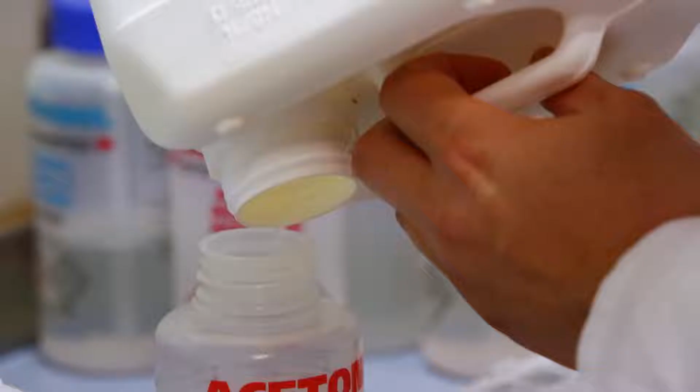We are Avantium. We are headquartered in Amsterdam, the Netherlands. Avantium is a leading technology company helping customers devise optimal high-throughput catalyst testing solutions.

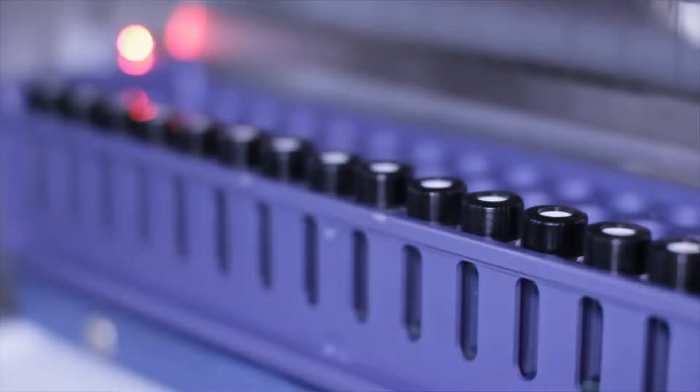Through our leading-edge technology platform, Flowrence, we enable customers to accelerate their catalyst R&D and unveil better understanding of catalyst properties and performance. We invented the Flowrence technology in a way that offers unrivaled accuracy and reliability and is easy to operate and maintain. It has a wide operating window and the ability to study a variety of chemistries.

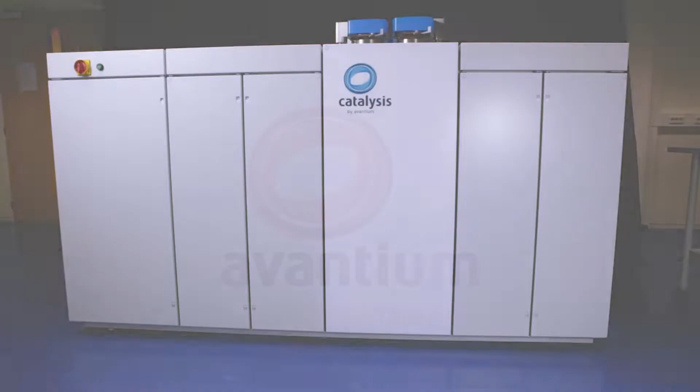Welcome to this webinar. My name is Tiago Vilela and I'm responsible for refinery catalyst testing at Avantium Catalysis. Today, we are going to talk about independent catalyst testing for refineries and how to choose the best catalyst for increased profitability.

Before we start, I would like to talk about the key value propositions from Avantium Catalysis. This webinar will be focused on our micropilot plant technology with 16 reactors in parallel, and how we guarantee the highest data quality. But this will not be possible without quality people. Our tests are executed by extremely qualified people with a background in catalysis and extensive experience in catalyst testing.

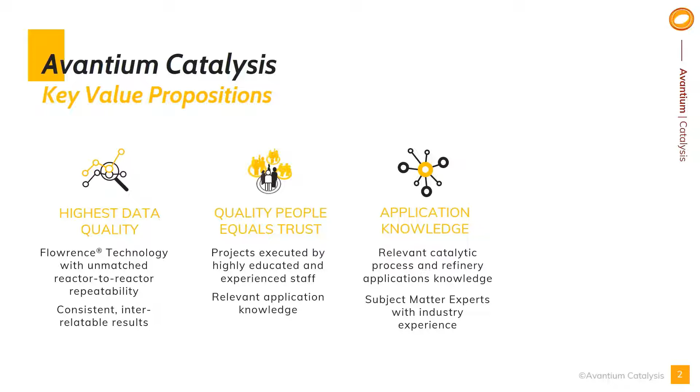We complement our testing knowledge with relevant refinery experiences. Our projects are supported by relevant subject matter experts. Last but not least, we are not linked to any chemical company or catalyst vendors, and more importantly, we adhere to the highest standards of integrity.

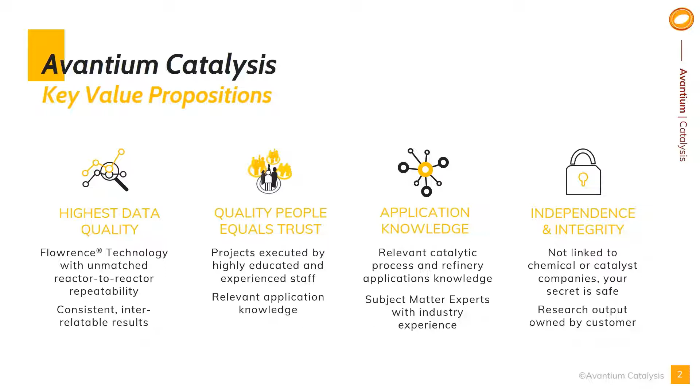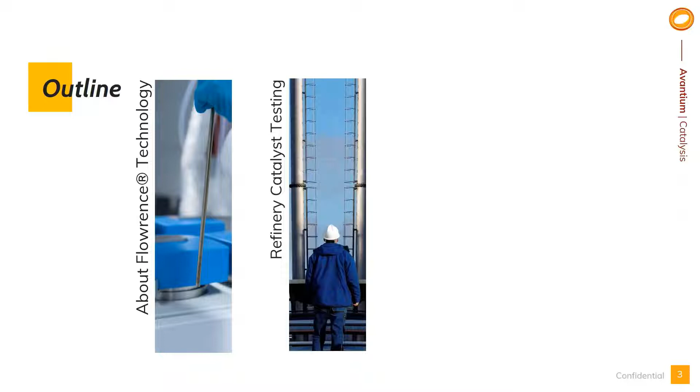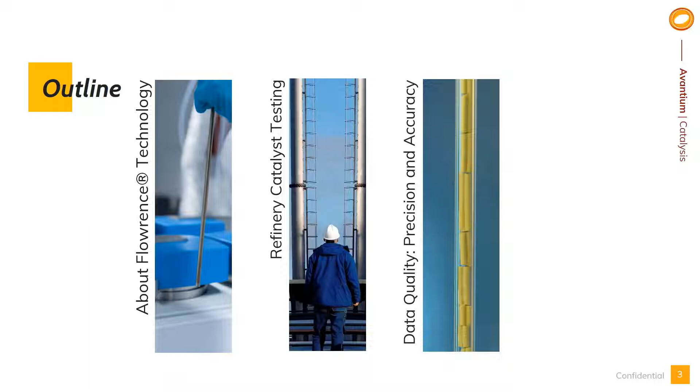In this webinar, we will cover the micropilot plant technology we use with 16 reactors in parallel, how we conduct refinery catalyst testing, and some guidelines and best practices. Then we will focus on the data quality and how we guarantee precision and accuracy of our test results. And finally, we will present reference projects with real case studies.

And in the end, we will show also a comparison of our test results with the commercial performance for a reforming unit.

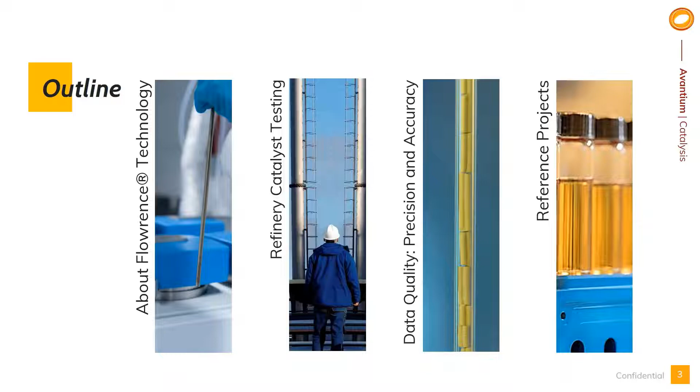Our micropilot plant technology is the most advanced in the world and has been independently validated by all the major catalyst suppliers. With this technology, we can accurately measure catalyst activity, conversion, yields, and hydrogen consumption. Multiple patents are in our technology.

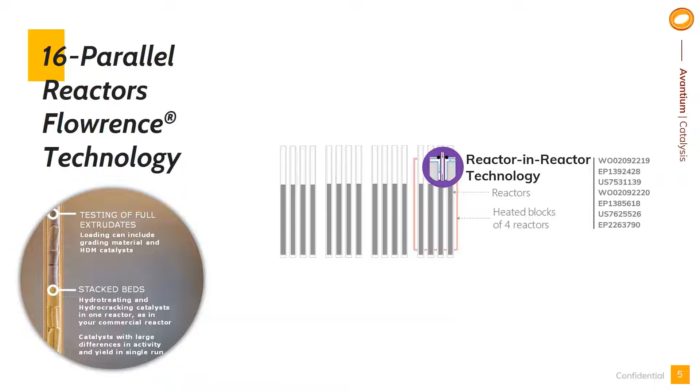The precision and accuracy achieved in our 16-reactor micropilot plants result from the combination of five key patented technologies. The reactor-in-reactor technology that allows for an accurate isothermal zone to ensure correct plug flow regime. The single string reactor loading, which is a special type of fixed bed reactor where the average diameter of the catalyst particles is close to the internal diameter of the reactor, and the full extrudates or beads are stacked on top of each other.

We have demonstrated the validity of this approach for hydrocracking, hydrotreating, reforming, isomerization, dewaxing, including stack beds, as we will see in the many test examples we are going to show today, and many other applications.

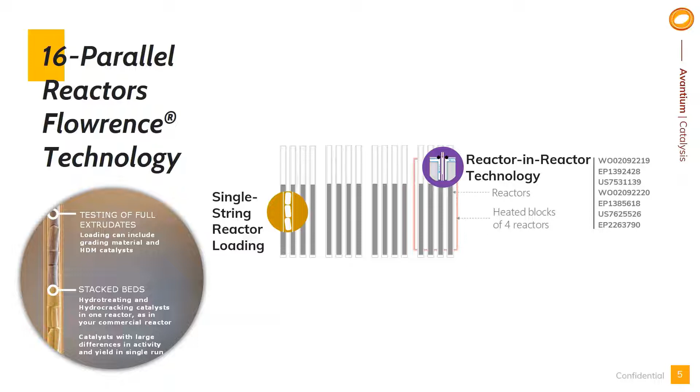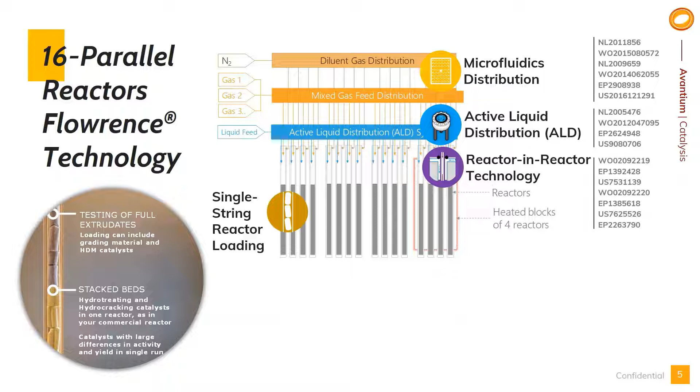Microfluidics distribution guarantees a narrow gas distribution over the 16 reactors. Liquid distribution is a narrow liquid distribution with real-time measurement and control of the liquid feed over the 16 reactors. Both the inlet and outlet pressures are measured. The pressure of all reactors is equally maintained within 0.05 bar variability using our reactor pressure control technology. This is especially important for low pressure applications such as reforming. It is important to maintain the same distribution of the inlet gas and liquid flows over all reactors.

For hydrocracking and hydrotreating, an automated gas-liquid separator collects the liquid for each reactor, and the gas stream is sent to the GC for further online analysis. The liquid samples collected are analyzed offline. For reforming and isomerization, the effluent product is kept in the gas phase and fully analyzed in real-time on the online GC.

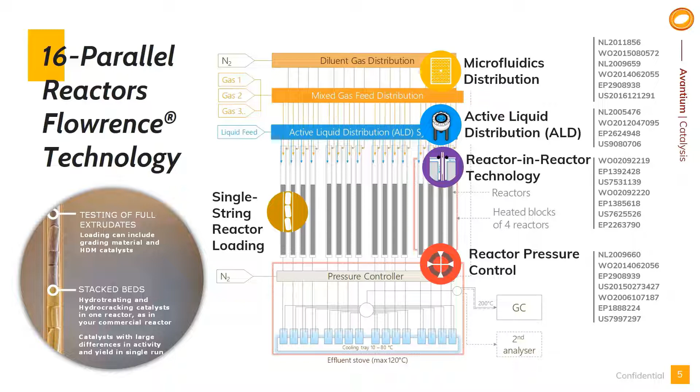Obtaining this high precision with flows, temperature, and pressure allows for outstanding reactor-to-reactor repeatability and the most accurate mass balance for all 16 reactors. This is very important in true parallel testing and ensures that all reactors are operating exactly at the same conditions. This also guarantees that the real differences measured for the catalyst are indeed true.

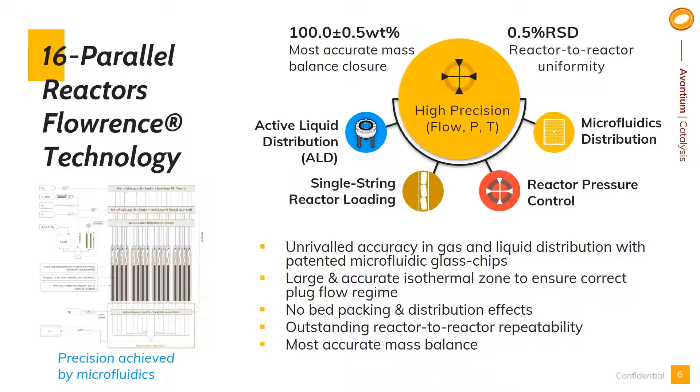Every test we perform, we compare the results with the vendor data, and when possible, we also seek to compare the results with the actual performance in the commercial unit. As we're going to see in some examples today, the results we produce are very consistent with the data provided by vendors and/or clients with larger reactor systems, and also from commercial data.

Now let's see how we conduct catalyst testing for refineries. We'll also present some guidelines and best practices.

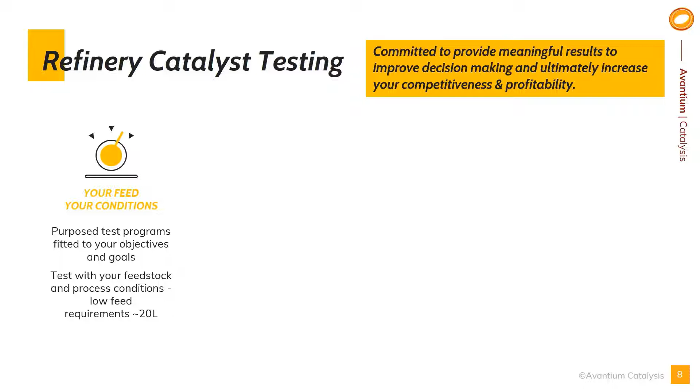We always test the real feedstock from the refinery, full extrudates, and at the refinery process conditions. Over the years, we have optimized and validated our test protocols with all major catalyst vendors. With 16 reactors in parallel, we can test the same catalyst multiple times, which greatly improves the data quality and the statistical significance of the results.

With 16 reactors, we can also test several options in one single run under the exact same conditions. This can also be very cost efficient.

We are committed to providing meaningful test results to our refinery clients to enable fact-based decisions for selecting the best catalyst with confidence. All our projects are executed by highly educated and experienced staff, supported by refinery application experts with extensive industry experience.

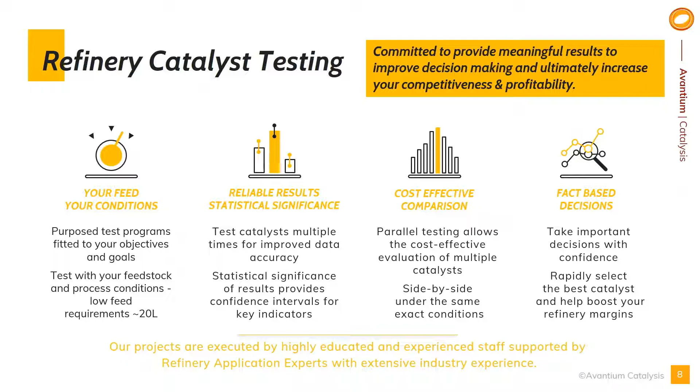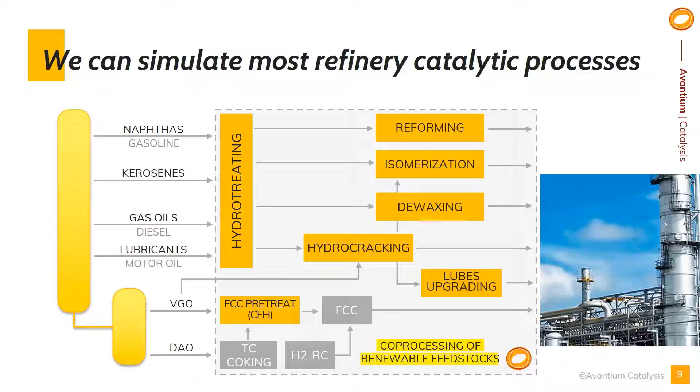We can simulate most refinery catalytic processes, including co-processing of renewable feedstocks, from hydrotreating to hydrocracking, reforming, and isomerization. To date, we have performed more than 150 tests for refineries and catalyst vendors.

In our project workflow, we always align the approach, methods, and test protocols with all stakeholders, including the catalyst vendors. The more tests we perform, the easier this process becomes. In the end, the client will always have the final word.

Before starting the test, we always ensure that the test unit is calibrated and all systems are ready. This is obviously extremely important to guarantee the best data quality of the test.

During the test execution, we keep close contact with all stakeholders, and when necessary, we are flexible to adjust the test in order to maximize the quality. Very important: we will repeat the run if our pre-agreed quality criteria is not met.

Regular reporting during the test execution is also very important. This will allow the client to make timely decisions on the test steering.

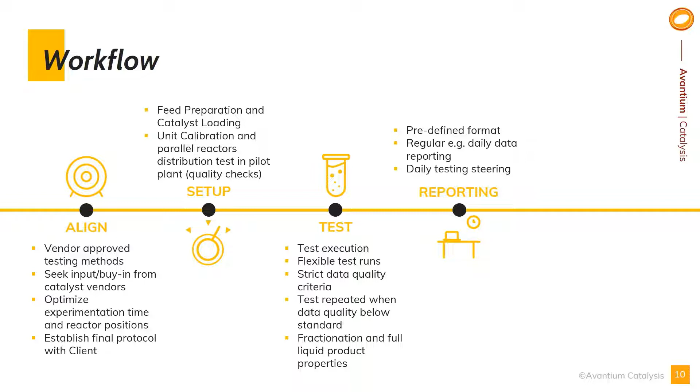Our reports are purposely structured for quick access to key results. At the end of the test, we provide the full data set and the complete description of the experimental design for future reference and for knowledge retention.

We also offer to present the results at your facilities and provide direct access to our subject matter experts when necessary. After the catalyst selection and the loading in the commercial unit, we always seek to obtain actual performance data and compare with our test results.

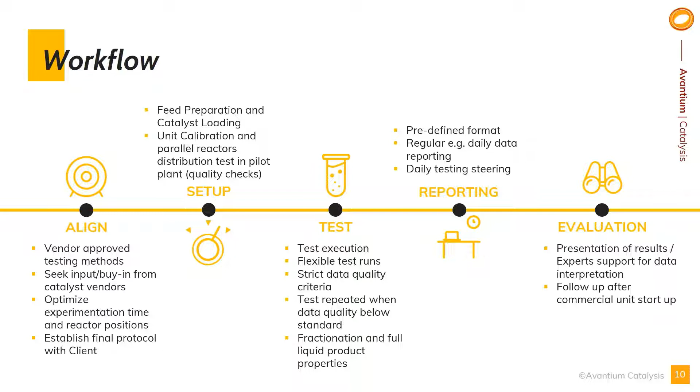So if we take the time that is required to order the catalyst, we always advise to do the test 3 months before this date. And then, of course, to do the test 3 months before this date, it's necessary that we start early, engaging with the testing labs to discuss proposals, and then also start discussing with the catalyst suppliers to have all the agreements in place to do this test. So we already have umbrella NDAs with all the catalyst vendors to facilitate this process.

So for more detail and information about this recommended timeline and the process of doing independent testing, I recommend you go and read this recent article we published in PTQ magazine in 2019, in the Q2 issue, or simply ask us for a copy.

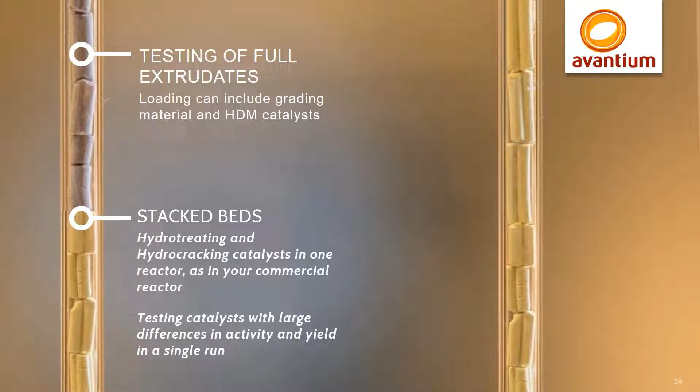Here we see an X-ray of our reactors. As you can see, we load all the extrudates one on top of each other. This is what we call single string reactor loading. Tests are extremely precise; we can differentiate small differences in catalyst activity and in yields. This is very important since small increases in yields and lower gas makes can result in significant savings.

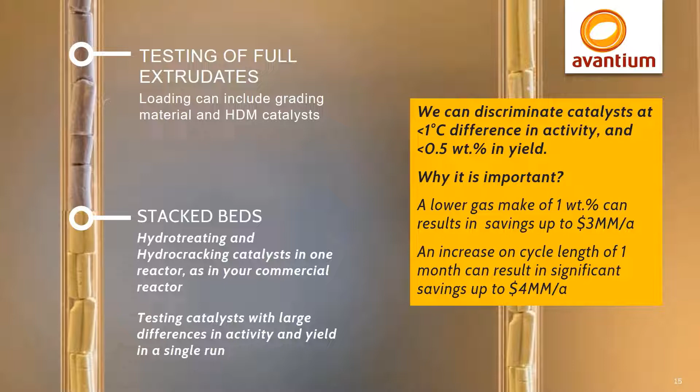Now let's look at reactor-to-reactor repeatability. This is when you test the same catalyst in 2 or more reactors and compare the results to see if they are close or not. In this example, there are 4 different catalysts tested in duplicate reactors, and if you look closer into the differences in conversion, they are essentially the same. So there's very little difference between the duplicate reactors, showing how outstanding our precision is.

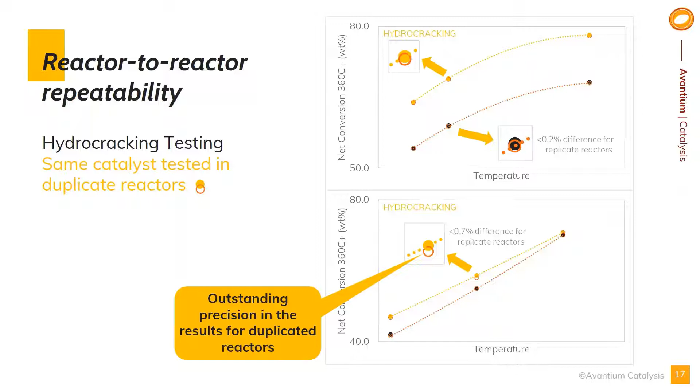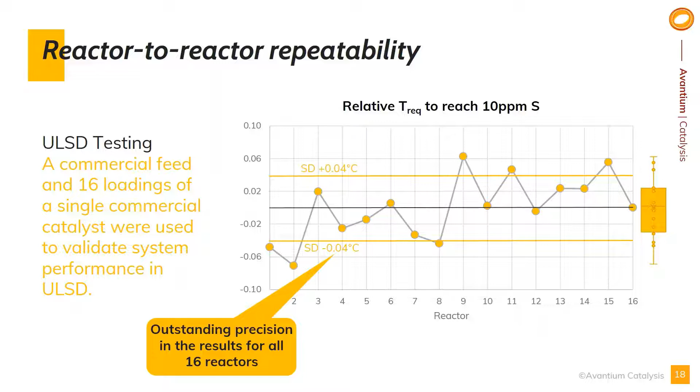At the ULSD test, we loaded 16 reactors with the same catalyst. As you can see, simply put, 16 reactors yield exactly the same sulfur when operated at the same temperature. Note the narrow standard deviation of 0.04 degrees Celsius - the same outstanding reactor-to-reactor repeatability.

Later on, we will look at the comparison of our test results with a commercial unit, which shows again the outstanding accuracy of our test results.

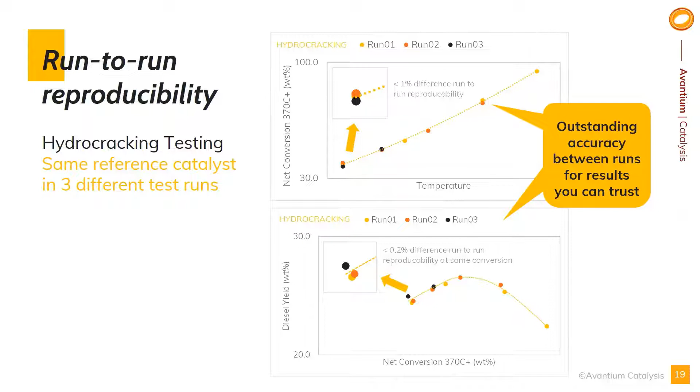This is the last part of our webinar. Here we're going to show a few reference projects where we perform catalyst testing for refineries for their selection process. We're going to show some key results for hydrocracking and hydrotreating.

In this test, we compared 12 hydrocracking catalysts where 4 catalysts were loaded in duplicate reactors. The test lasted 38 days with 3 conditions and liquid collection for fractionation. Because of confidentiality obligations, we will only show the results for 3 catalysts, A, B, and C.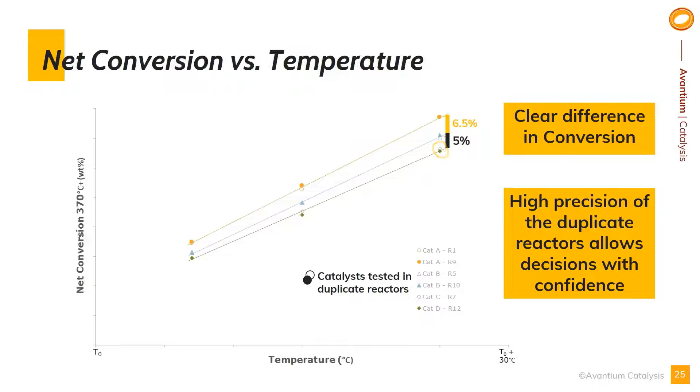Without surprise, the same high precision of the duplicate reactors is obtained for conversion versus temperature. Now looking at product selectivity, we can see that despite the differences in activity, there is no real difference in selectivity for these 3 catalysts - once again, a very high precision of the duplicate reactors.

In this next example, we evaluate 4 vendors for a mild hydrocracking catalyst selection. The pre-treat and hydrocracking systems are loaded in the same reactor and operated at the same temperature. All systems were tested in quadruplet reactors for maximum precision. The objectives of these tests were to rank the activity of the systems and the selectivity structure towards maximizing middle distillates.

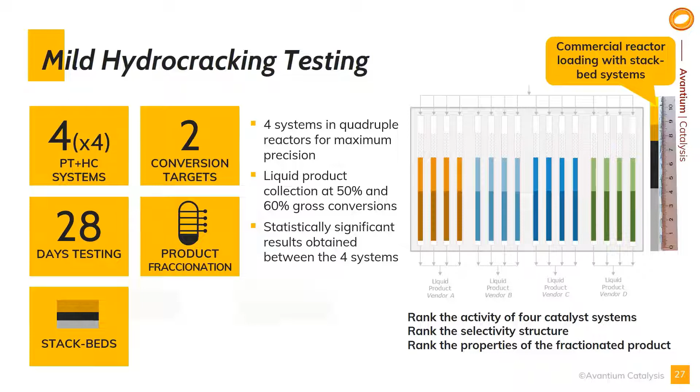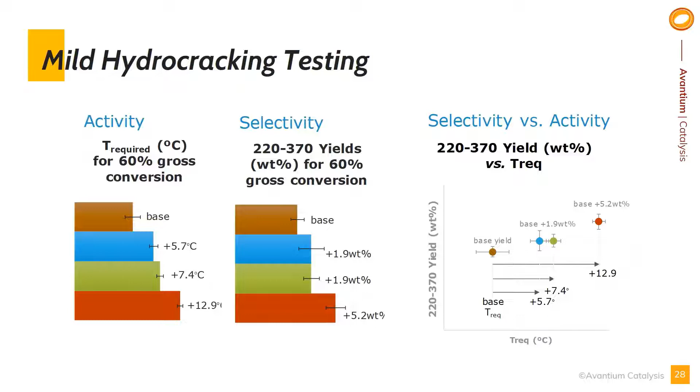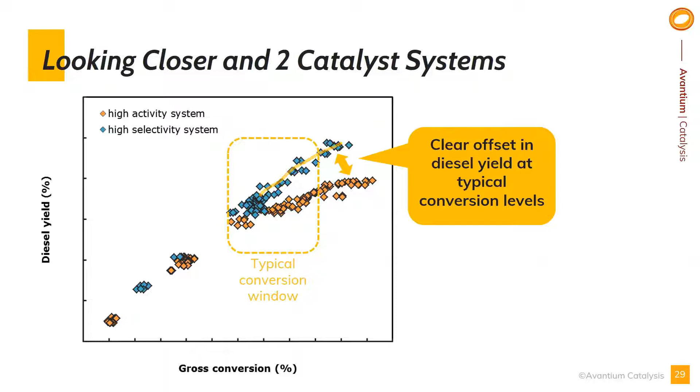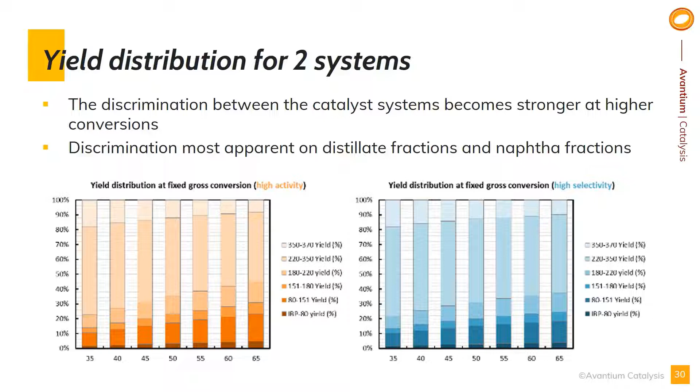Looking closer only at the 2 systems with the biggest difference in activity, the high activity versus the high selectivity systems, we can clearly see an offset in diesel yield at higher conversion levels. So we can see that the discrimination between the catalyst systems becomes stronger at higher conversions. This discrimination is most apparent on distillate fractions and naphtha fractions. Looking at the liquid product properties, we can see a consistently lower cloud point obtained with a high selectivity system.

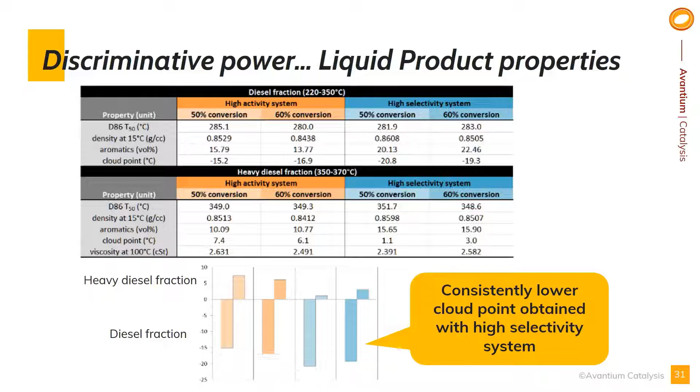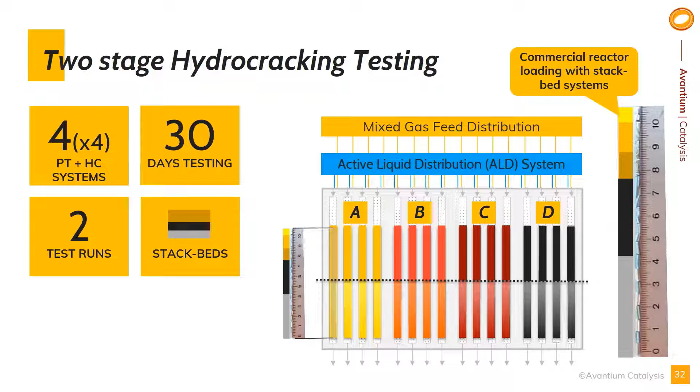In this next example, we have tested 4 vendors in 2 separate runs for a 2-stage hydrocracking catalyst evaluation. Both the pre-treat and the hydrocracking systems were loaded in 4 different reactors. First, we tested the pre-treat systems at the same nitrogen slip and then compared the T required to achieve that nitrogen slip. Then we've tested each of the different vendors at the prescribed target nitrogen slip by the vendor.

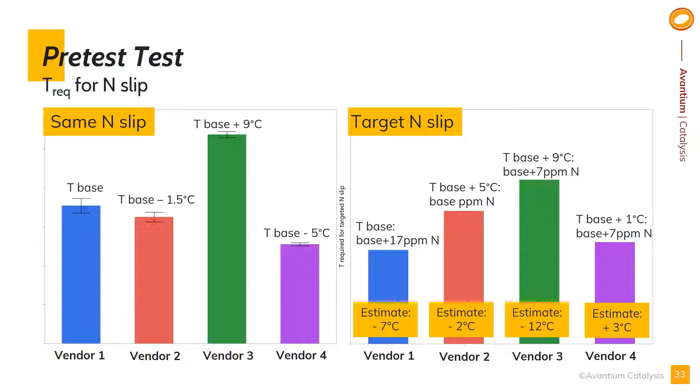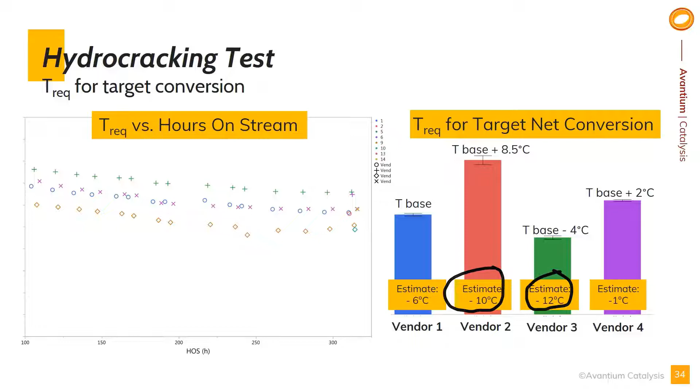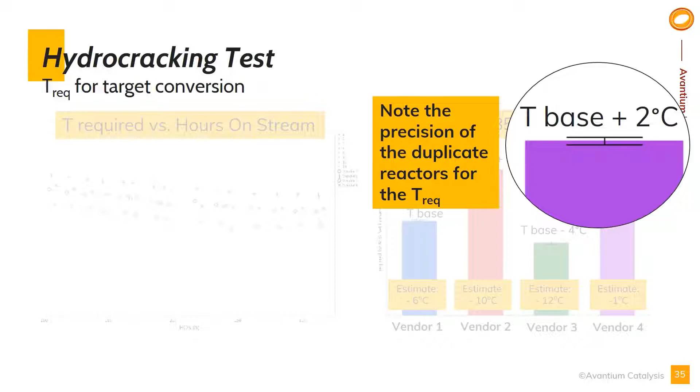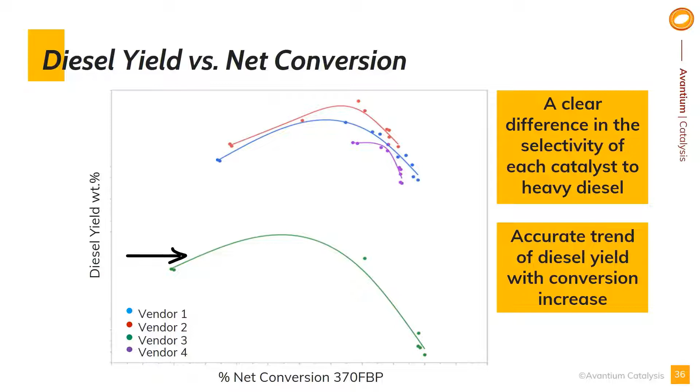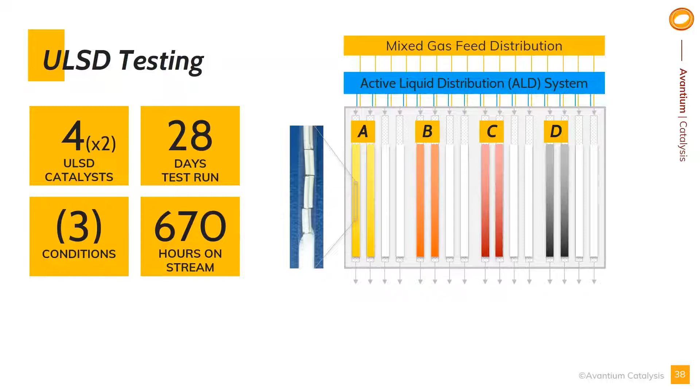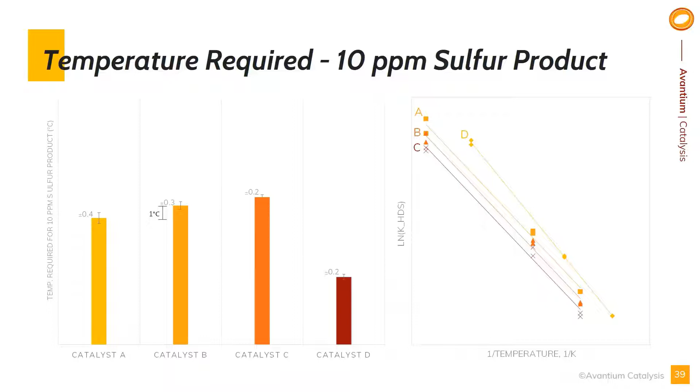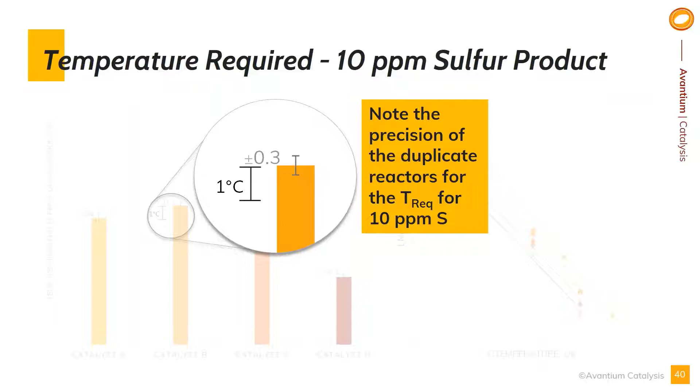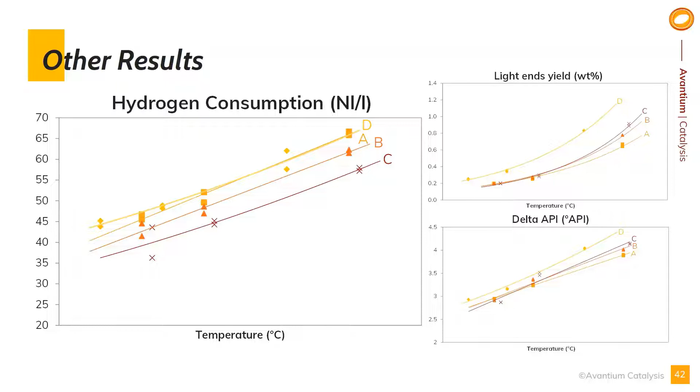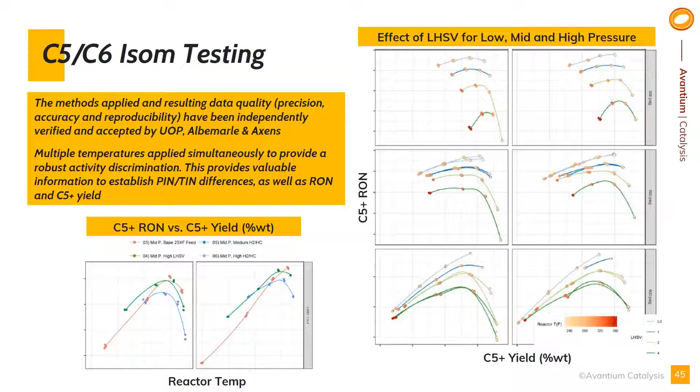You can see here in this slide some examples of the results obtained. On the left side, you see C5+ RON versus C5+ yield, and on the right side, you see the effect of LHSV for low, mid, and high pressures. As already mentioned, this was a very large program that produced a lot of data for our client, and here we only show a snapshot of these results.

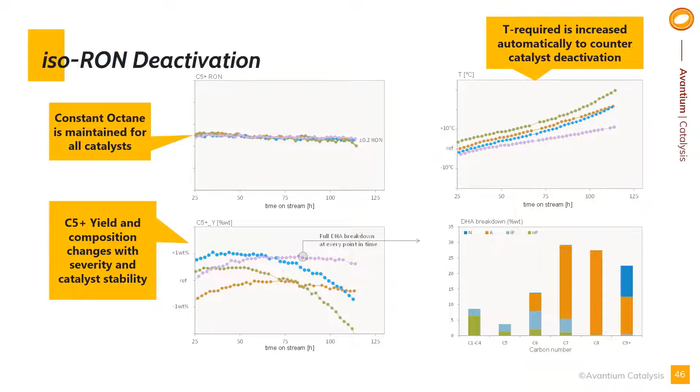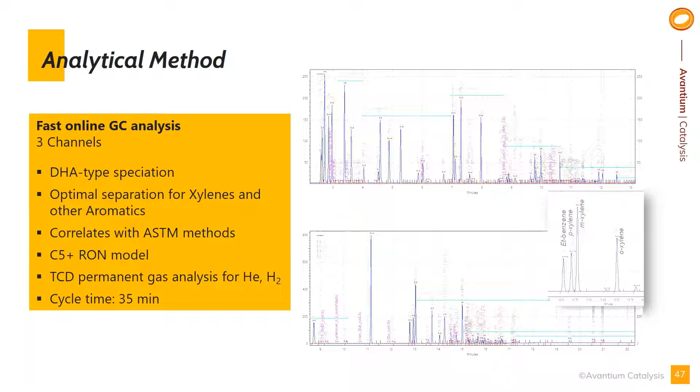To compare reforming catalysts, we use our fast proprietary analytical method for the detailed analysis of the hydrocarbons. Then RON is calculated using a C5 plus RON model. In this example GC chromatogram, please note the amount of detail that is measured in the 35-minute GC method.

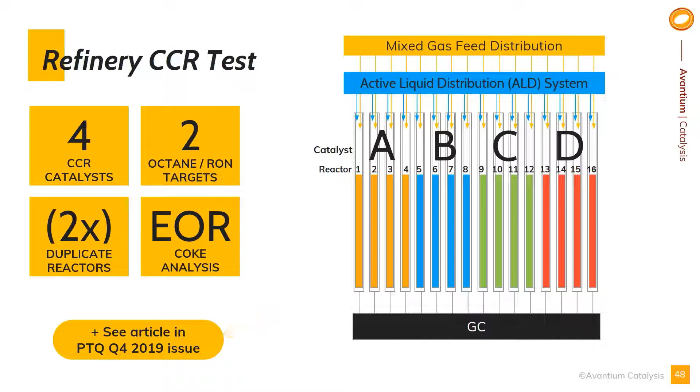In this reforming example, we have compared 4 CCR catalysts with 2 octane targets and each catalyst loaded in duplicate reactors. See also the article published in PTQ Q4 in 2019 that explains in detail this case study. Interpolation at fixed time on stream allows a direct comparison of the effect of the higher octane target on activity and yield. Interpolation at different times on stream allows a better comparison of the changes in activity and yield.

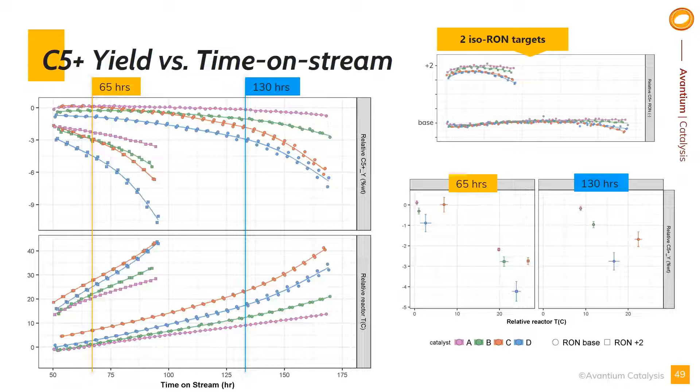If we go back to our comparison of catalyst A and C, we see that catalyst C is overcoked compared to catalyst A. This was carried out on purpose in this case. Typically for our CCR tests, we ensure that coke content never exceeds the maximum that is typically observed at the exit of the CCR reactors, around 5 or 6%. The coke buildup probably accelerated very rapidly after 130 hours, leading to the sharp drop in C5 plus yield observed.

If we compare catalyst B and D, we see that they have similar coke content at end of run conditions for both octanes. But catalyst B is much more coke resistant and shows very little decline in activity or C5 plus yield. The lower coke make will provide greater flexibility to increase the product severity and, for example, increase aromatic yield or to process more demanding feeds like thermocracked naphtha.

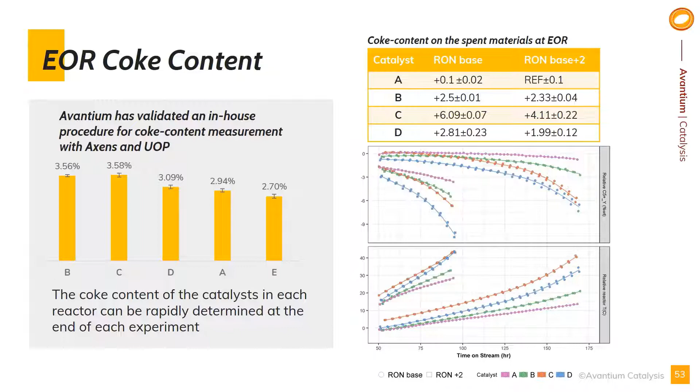Sometimes there can be a balance between the ability of the catalyst to achieve high yield and its ability to maintain the product severity. Such isoRON tests that we perform allow the precise comparison of the yield trends and the stability trends. As I already mentioned, we seek to validate the accuracy of our technology by comparing our test results with the performance in the commercial unit.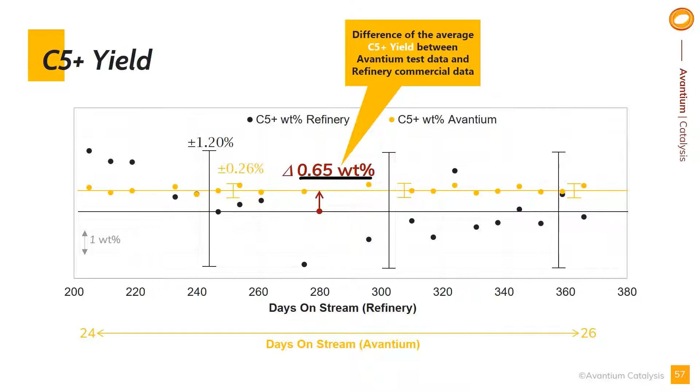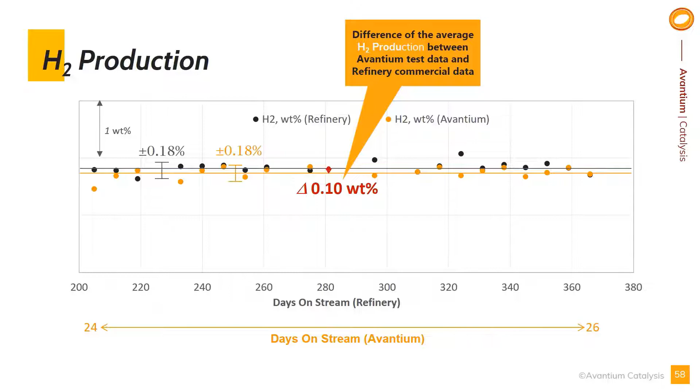When we compare the hydrogen production obtained in our test results and the performance in the commercial unit, we can see that the values are essentially the same. So there's virtually no difference between the results obtained in our pilot plant and the results in the commercial unit. So this shows how outstanding the accuracy obtained in our tests is.

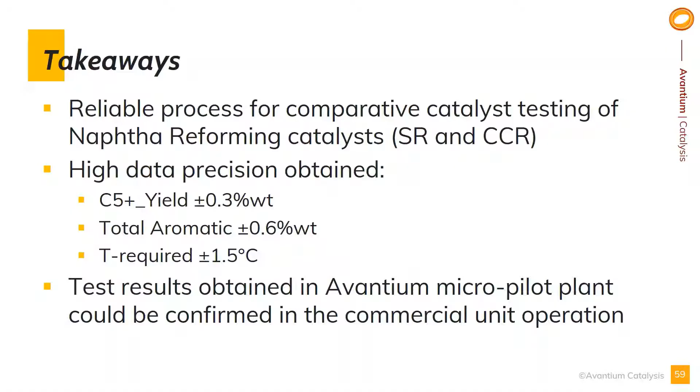In this comparison, we can see that our test results are very consistent with the performance of the commercial unit for both the C5 plus yield and the hydrogen production. This is obviously a great validation of the accuracy of our pilot plant technology.

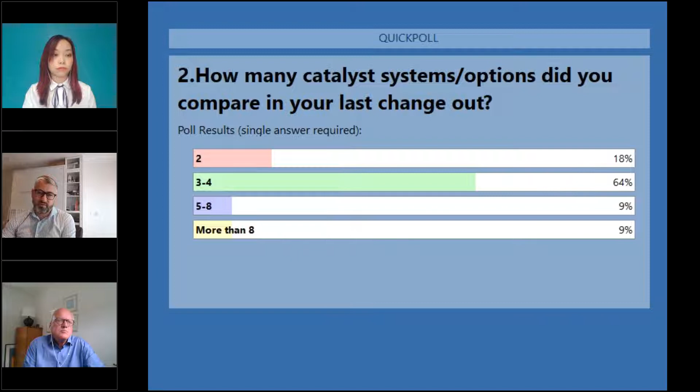Yeah, so as you could see from the presentation, we have 16 reactors in parallel, right? So one of the things that high throughput brought into independent catalyst testing is the option to test several options. So you're not restricted to only test a few options. In the beginning, for example, in one of the first tests we did for the two-stage hydrocracking unit, we compared only the incumbent with a new option from the same vendor and another vendor. So those were the options we compared.

But obviously, when you have 16 reactors in parallel and the incremental costs of testing 4 options or 8 are not significant in the overall cost of the test, I would say this has also been promoting that option. Refineries don't have to test only different vendors. They can also ask the vendors to propose different options. And especially when you're talking about stacked bed systems, there are a few variations on the stacked bed systems that could bring more value to the refinery.

So we always say ask the vendor for several options, and I'm not surprised that most of the people test 3 or 4. This is also limited by the traditional pilot plant testing that is offered to refineries, which is limited to 4. But then, of course, with high throughput's 16 reactors in parallel, more people are testing more than 5 options and up to 8.

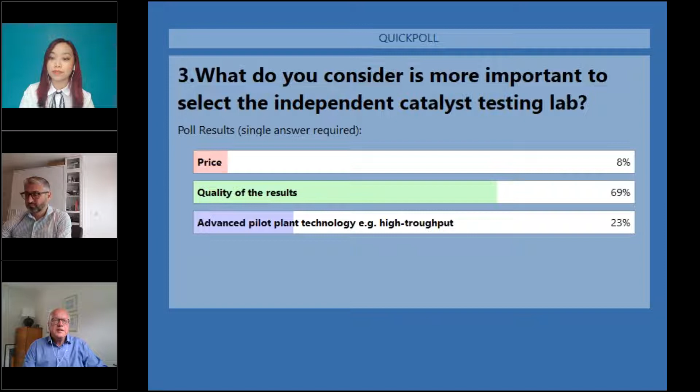Thank you all. So we've seen that most of you have said that it's the quality of the results that is more important than price or the advancement of the technology that is going to be used. Theo, what do you think of this? Yeah, I can see from the results that quality is seen as the added value of independent testing.

I do understand that, because when you, as a refiner, have 3 or 4 technical proposals from catalyst vendors, the formats can be different, so you have to compare those 4 proposals to a common baseline somehow, and of course refiners will use their LP model to evaluate that performance. So the benefit of independent testing, especially with 16 reactors, is that you have a back-to-back comparison,

same conditions, same operating conditions. That rules out having to compare four different formats of proposals. So I can see the outcome of the poll. All right. Thank you very much for your input, Theo.

So now we're going to move on to poll number 4, which looks at the planned change-out date. With reference to this, when do you normally start planning independent pilot plant testing? The options are more than 18 months, 17 to 12 months, 12 to 9, and less than 9 months.

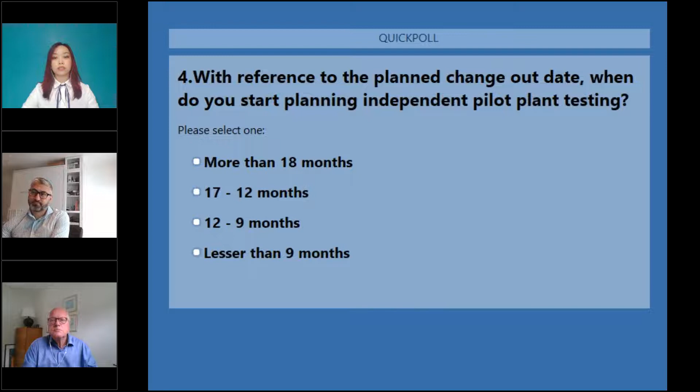All right, thanks for voting. So we can see that the majority, about 36% of you, feel that within about 12 to 9 months is when you start planning for independent pilot plant testing. And we actually have a tie between more than 18 months and 17 to 12 months. So I guess there isn't that much of a difference there. Tiago, what do you feel about this?

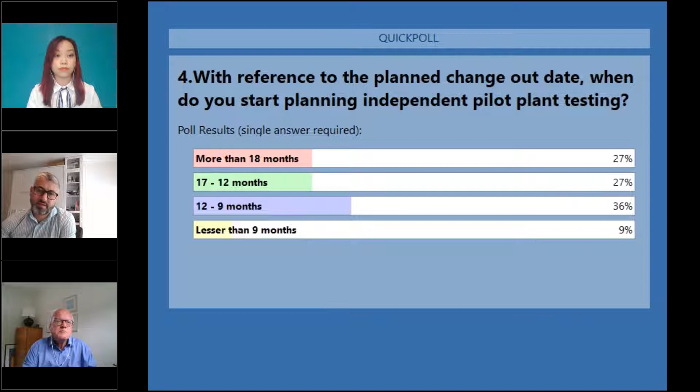Yeah, I'm glad to see that this is the case. As I presented today, there was obviously a help me, help you strategy here. So that's why we wrote this article where we also present this recommended timeline. It is important that refiners recognize that this is very important.

So it's not just selecting a testing lab and then, okay, give us the data and then we use the data and this is like a magic ball. No, I think it's important that you start early. I think it's also important that the refinery takes responsibility for the tests.

And then by implementing this in the refinery and making it a procedure, right, then you can build on it and you get better and better with it, and then you establish also trust relationships with the testing labs. By using a testing lab that you think is trustworthy and produces good results, such as Avantium, you can also compare results with previous tests, and then you can build on it as well.

So I think it's absolutely necessary that you start early, but like everything in life, once you go through it once, twice, 3 times, then it becomes really easy. Catalyst suppliers nowadays accept more and more that this is a practice that is here to stay. And if you can't fight them, then join them. That's also what we do in our business. We collaborate very well with all the vendors. Like I said in the presentation, they are also our customers. They give us a lot of business as well.

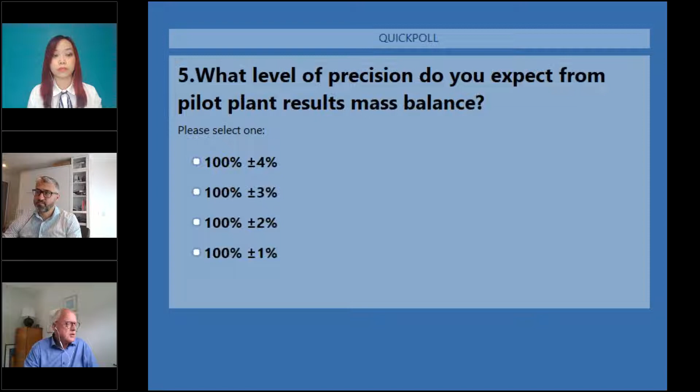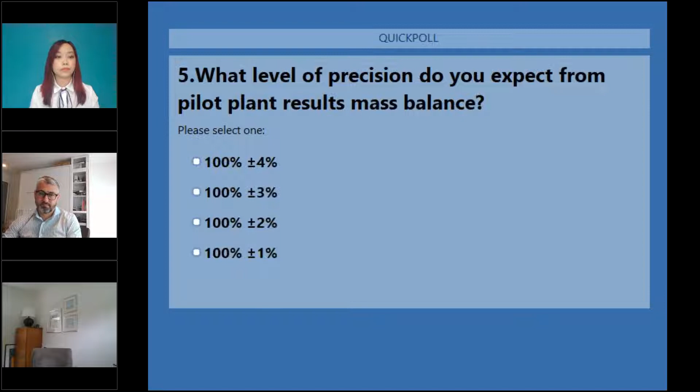All right, so it's almost overwhelmingly 100% with a buffer of 3%. So nobody says buffer 4% or anything. Tiago, what are your thoughts on this?

Yeah, it's not surprising, and there's a reason why we put this question in there. I think depending on the application, there's different levels of accuracy. We believe that we have one of the most accurate, if not the most accurate, system available. I think mass balance is often seen as an absolute quality criteria, but there are other quality criteria that you have to look at as well.

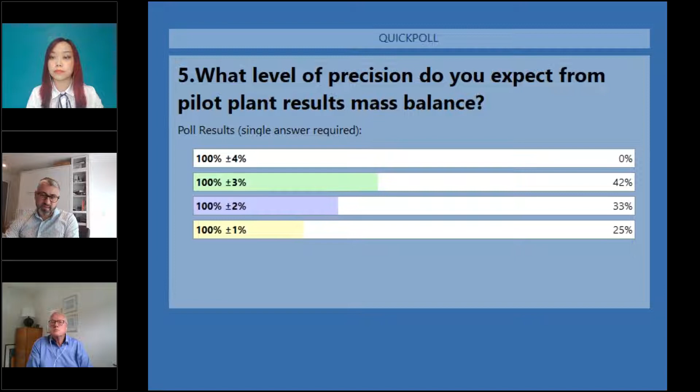I see that plus or minus 1%, some people tend to go to plus or minus 0.5%. This is something that we can achieve, but I would like to note that having a mass balance of plus or minus 2%, that's what we guarantee. It doesn't mean that you're going to have a plus or minus 2% on your activity or diesel yields. So often with plus or minus 2%, you can get much lower confidence intervals for your activity and for your selectivity as well.

All right, but yeah, obviously mass balance is an important factor in this case. In our systems, mass balance is actually the total error of the system. It includes the error in the flow meters, the error in the weighing, the error in the distribution of the 16 reactors, the GC error — so all the measurements. So it's no surprise that this goes into plus or minus 3%, plus or minus 2%, and I'm glad that people understand that plus or minus 2 and plus or minus 3 is as good as you can get.

And of course, like I said, if we can get to plus or minus 0.5%, like we can, it's outstanding.

All right, so now we'll move on to our final poll question for the session. What difference would you accept between the activity obtained in the pilot plant and the commercial data? So we look at less than 1 weight percent, 1 to 2, 2 to 4, and more than 4 weight percent.

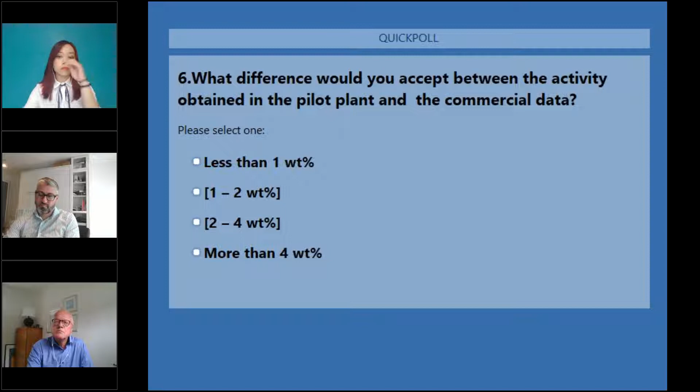All right, thank you all for casting your votes. About 10% said you'll accept less than 1 weight percent, whereas it's almost a tie between 1 to 2 and 2 to 4 weight percent. So we've only got about a 10% difference there. So Tiago, Theo, what do you think of this? What are your thoughts?

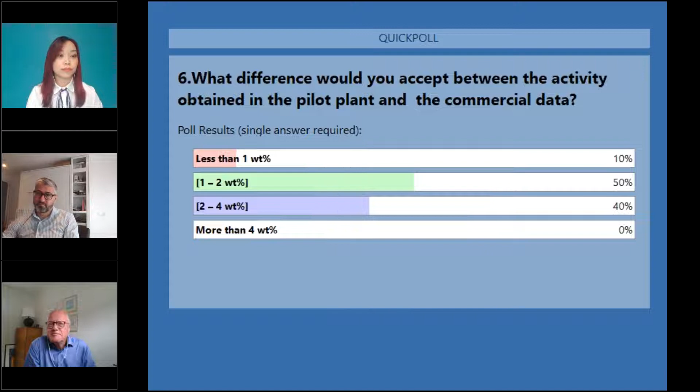Should I answer, Tiago? Yeah, you can go first this time. Yeah.

I think 1 to 2% weight difference is quite acceptable, and in my experience that is basically the right figure. 2 to 4% weight is a bit high. When the accuracy of the activity translates to a 4% difference in yields, when you look at the value, when you would have 4% less diesel or 4% more naphtha, that's quite a difference. So I would say that 1 to 2% is quite a good common figure.

Tiago? Yeah, I would agree as well. We can achieve less than 1%. And then, of course, there's a couple of things here. That's why we try to make the distinction between precision and accuracy.

So precision is what you can achieve in your own system. If you compare, if you do two tests with the same catalyst, what kind of results do you obtain? And then accuracy is, of course, when you compare that data with other tests, with other pilot plants, with the commercial unit.